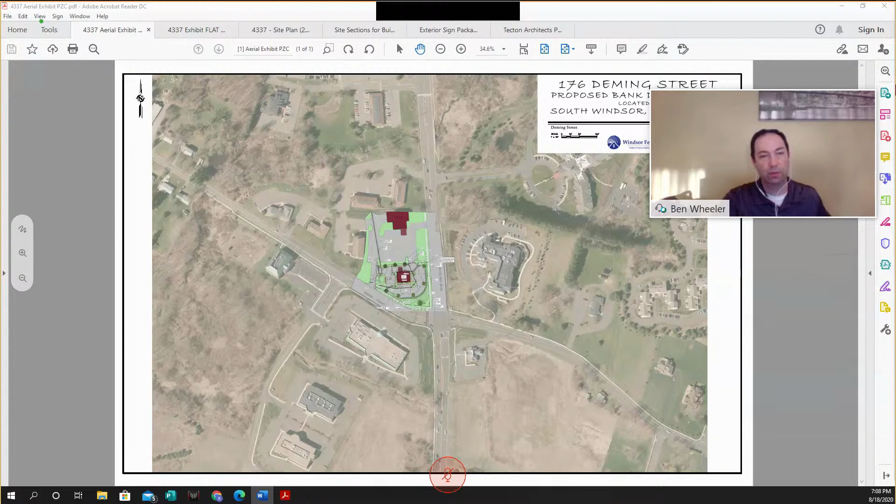The bank building is going into the currently vacant site where Woodcock Attorney used to have his office, in the building that was razed within the last couple of years. So now it's a vacant site that Windsor Federal has an agreement to purchase and build this facility on. The main access for this building will be off of Deming Street at the current access point that services many office buildings and the south end of the Samsel and Carmon Funeral Home, which you see at the north end, the top end of this exhibit here.

That access point will be widened to meet town standards for parking width, parking access width, and to make sure that traffic flow through that area, it will facilitate better traffic flow.

As part of this proposal, we're providing 33 parking spaces around three sides of the building. Only 16 are required per zoning, but as proof of how Windsor Federal is a community player, they've worked very closely with the Samsel and Carmon Funeral Home, understanding that, especially during large events, the funeral home is short on the number of parking spaces. So they've already come to an agreement with the funeral home to use the proposed bank parking lot as overflow parking for any large events at the funeral home. That is why we're providing so many parking spaces as part of this proposal.

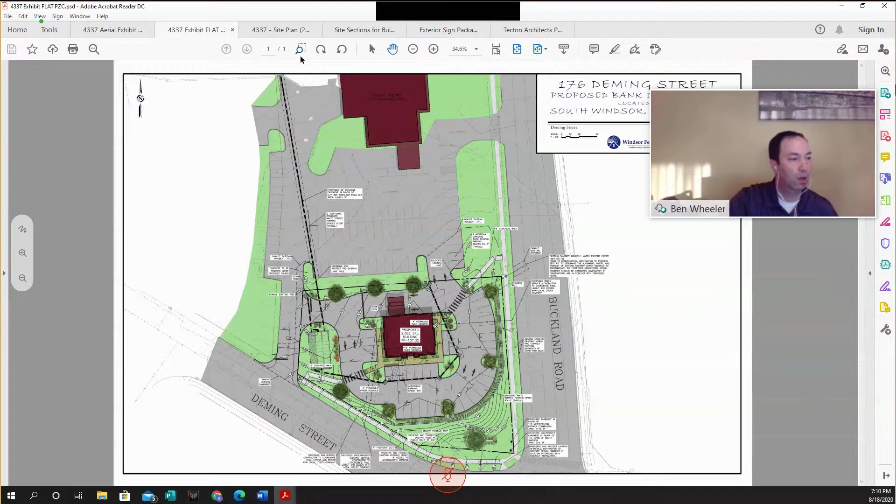If we zoom in on the site plan a little bit, there are walkways around the building. Those will actually be permeable pavers, so it'll be a nice look to the building, complementing the building, and also aid in making sure that we meet the impervious coverage zoning requirements.

In addition to that, we're providing crosswalks and sidewalk extensions connecting to both Buckland Road and to Deming Street. The Deming Street connection will connect into a new sidewalk that Windsor Federal will build all the way from the intersection at the road all the way down to that shared access point that I mentioned earlier.

It's important to note there is no dumpster proposed as part of this site plan. In general, these days in the digital age, Windsor Federal does not generate a large amount of refuse. What is generated is typically either shredded, or the crew that they have that comes in and cleans the facility will take care of any refuse and dispose of it off-site as appropriate.

As for landscaping, we've provided a landscape plan with the application. It provides foundation plantings around all sides of the building with low shrubs and perennials in the islands, as well as several flowering and deciduous trees throughout the parking lot, meeting the zoning regulations.

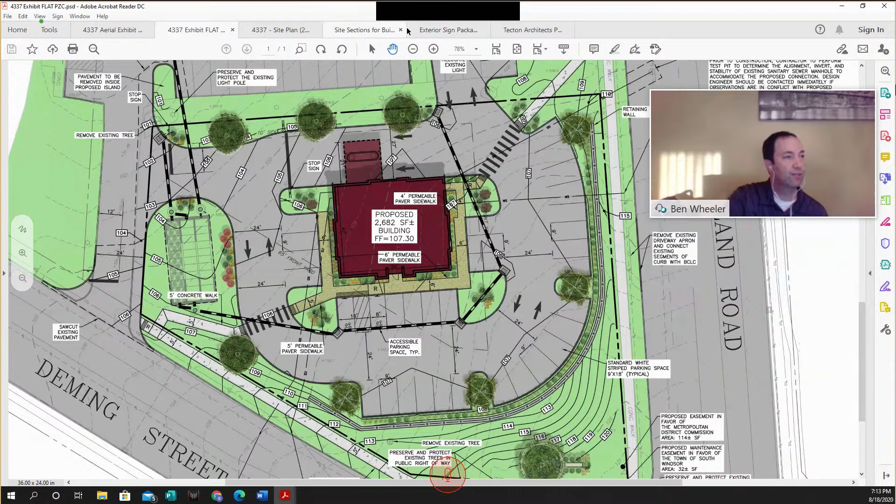As far as the building is concerned, it's a single story inside, but portions of it look like a 2-story building on the outside. The reason is because this building will sit lower than the intersection of Buckland Road and Deming Street, so we wanted to make sure that as you're sitting at that intersection, you're not looking down on the roof of this building.

Nonetheless, it's a nice looking building—a modern colonial look, with a mix of brick at the corners and clapboard siding, and a standing seam metal roof with a skylight at the highest peak to let in natural light during the daytime and provide a soft glow in the evening. This is complementary to other buildings in the area, like the residents at South Windsor Farms directly across Buckland Road, and the People's United Bank on the opposite corner, as well as the funeral home and other office buildings in the area.

As I mentioned, we went to Architectural Design Review Committee and it was very well received. One positive comment was that the clapboard siding areas, originally proposed to be all white, should implement a dove gray color instead—not a drastic change. The updated renderings and plans we've submitted have taken that comment and implemented it to provide a little contrast, so the entire clapboard siding is not completely white as originally proposed.

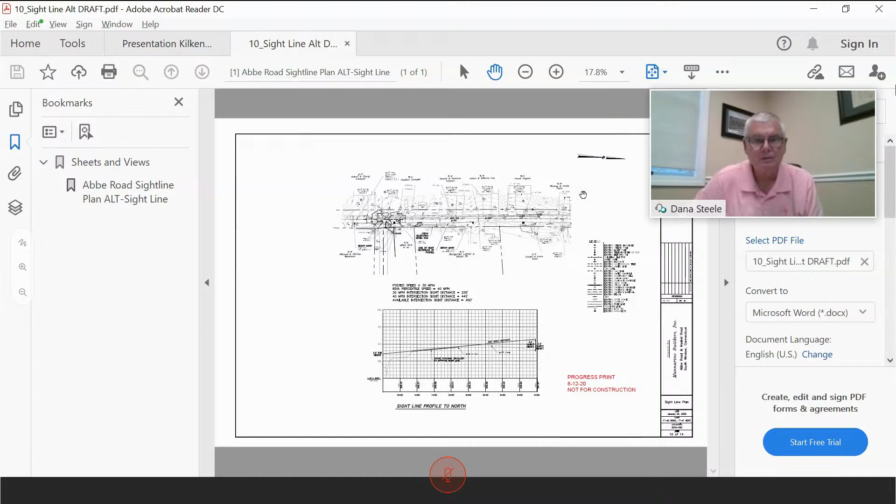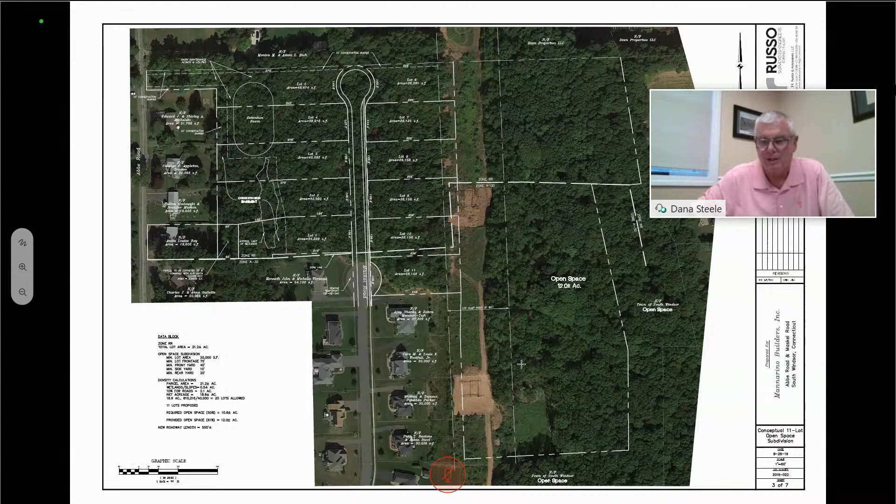There's a third concept, which is the one really that we're bringing before you tonight, which the commission decided is the way they want to go. The staff, public works and so forth, emergency services, decided that they wanted this road to come through and connect up with Abbe Road. That's what this shows.

Again, it's 12 new lots, 13 lots total, and it gives you that additional 12.09 acres of open space. That open space is located over here to the east and to the south and to the east, and again ties into existing open space land that the town already owns. I think we all felt that this was the right way to do this. So one of the things that we did with regard to the open space is, how valuable a piece of land is this?

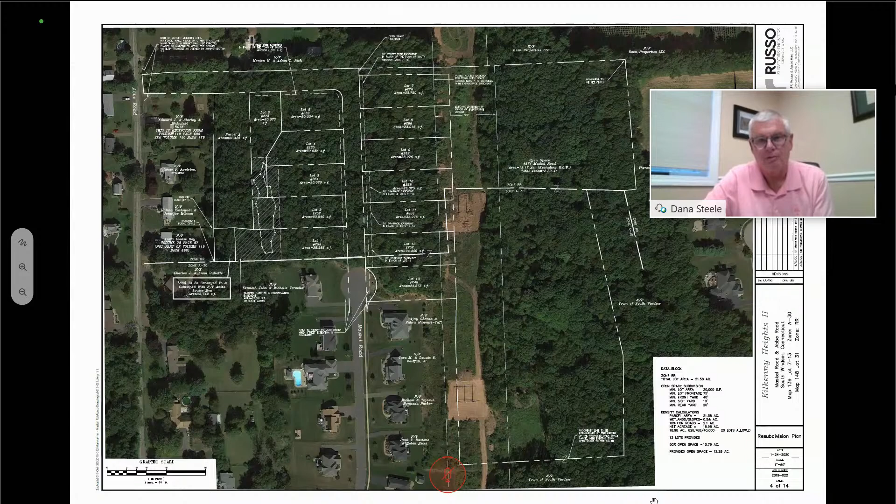What is it giving the town in terms of passive recreation and so forth? So Mannarino Builders hired REMA Ecological Services to go out and take a look at this piece of land. George Logan did a nice report, which is part of your application, and we have that here.

I'm just pulling up one page of it here that we can take a look at on the screen. Essentially, the 12 acres of open space that I've got the cursor on right here is the piece that's part of the subdivision dedication that would be conveyed to the town if this is approved. Here's the end of Maskel Road. Our road would come through this particular parcel and come back out.

But you can see these other areas of green are open space parcels that the town of South Windsor already owns. There's access here, full access off of Fraser Fir Road. This additional piece can be accessed through a right-of-way out to Maskel Road at this location. We're going to be providing an additional access up here on the north end of our project to access the north end of this parcel.

So it's something that really ties together a very large portion of open space for the town. If you've looked through REMA's report, there's a number of things that George Logan talks about regarding this 12 acres of land, but I'm just going to run over it very quickly.

One of the things he mentions is that it's essentially what I guess I'd call a northern hardwood forest. It hasn't been farmed, hasn't been logged recently. He's got photographs back to the 30s. And there are some very large deciduous trees located on this property.

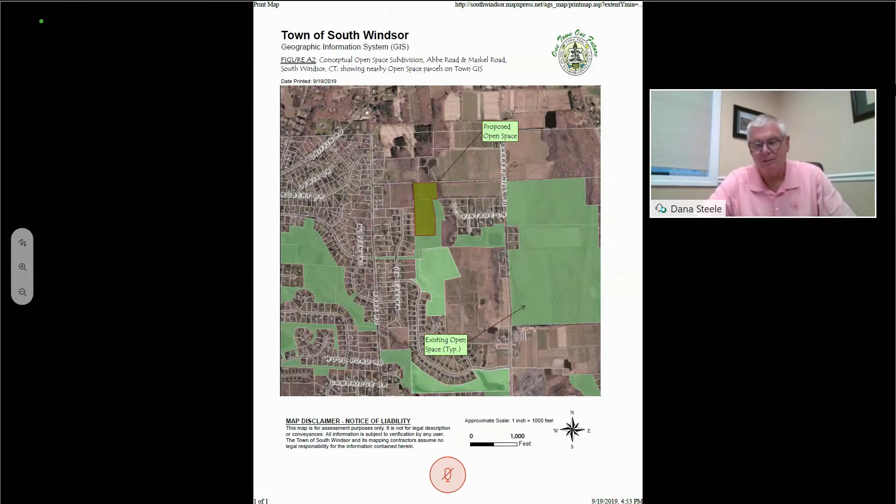So it's important for the town to have a piece of land like this, because most areas, at least in the valley here in Connecticut, have all been farmed for the most part. Anything farmable has been farmed. Trees are typically smaller growth stuff, and this isn't like that. It's a piece of land that's got some substantial tree growth on it.

And I think we have some photos. I'm just going to go a little bit further forward here. If you look at the lower photo, here's a fairly large diameter oak tree with George's auger set up against the side of it.

And I think the next photo shows a fairly large beech tree that whoever Zoe is visited in 1996 and put their initials in. You can see that these trees are probably 70, 80 years old. They've been here a long time. So George's thought is that this is an important feature of this particular piece of open space.

He also noted that it's devoid of any invasive species, which we see a lot around wetland areas. This doesn't have that, which is a nice thing to have in terms of our open space. It's got a lot of diversity in terms of its plant life, wildlife, mammals, and avians, and so forth. And it creates a nice connection or habitat in a wildlife corridor.

It connects up with the rest of the town's open space, but it's also got an Eversource transmission line that runs through it, provides access, provides a walking trail for people who might want to use it, but also creates a nice wildlife corridor for movement of mammals and animals to go north and south through all the open space and onto adjoining properties. That's always going to be there as long as that Eversource area is there.

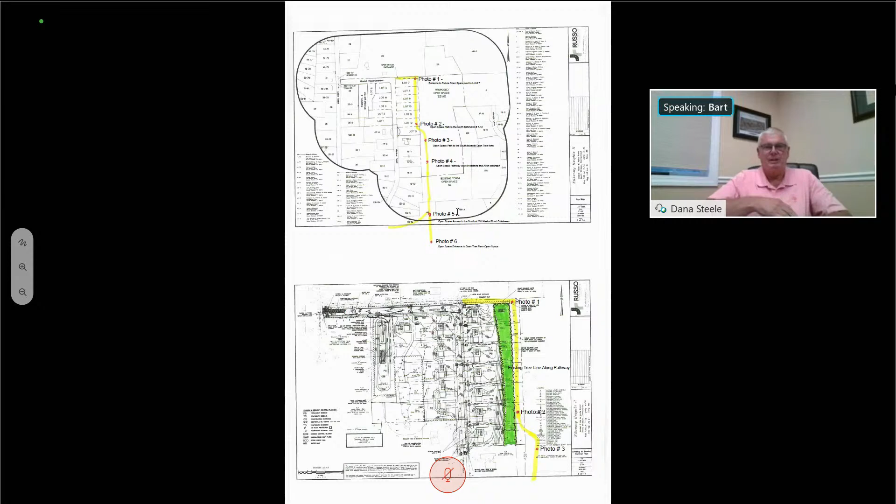So I thought it was important to show you that as we move forward and take a look at what we're proposing today. Let me just switch screens for you. If we look at the upper screen here, Rob Manarino's gone out and taken some photographs of the area of the open space. If you look at the upper photo, we've got photo 1, 2, 3, 4, and 5. These were taken along the walking trail that's already there on this open space. We can show you these photos so you can take a look at those.

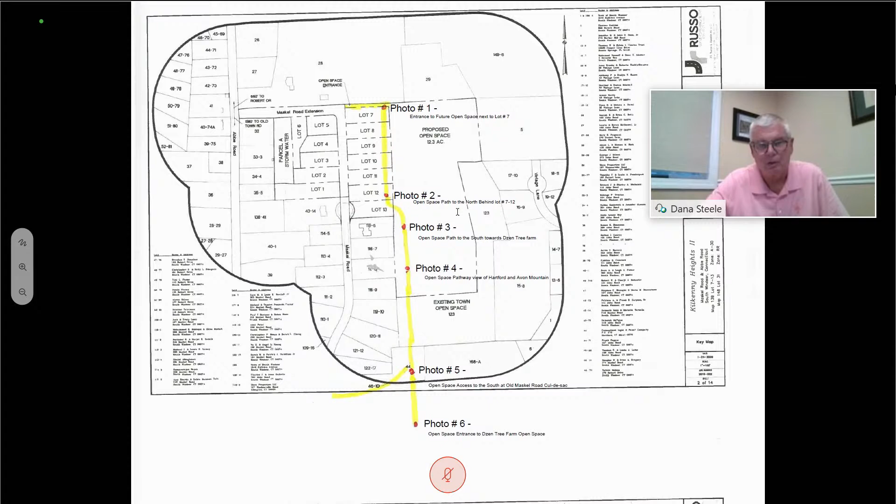Let me go to the next screen. This is photo 1, again showing the walking trail, right where we will access from the turn on our extension of Maskel Road. If the road heads northerly and then turns to the west, we would be accessing at this location with a grass walking path 10 feet wide to gain access off our roadway and reach the open space at this location.

As we move further to the south, Rob's got a photo here again showing the existing path or trail that's already there. This would be used by anybody who wanted to walk onto the open space and go northerly or southerly, or continue east to take a look at the forested area. Photo 3, again, access to the open space heading southerly, and as you can see, it's a very nice trail.

It was recently improved by Eversource when they upgraded the transmission line in this particular location. Photo 4 is an area where, I don't know if any of the commissioners have been up here. I have been up here, probably 6 or 7 years ago, with the property owner.

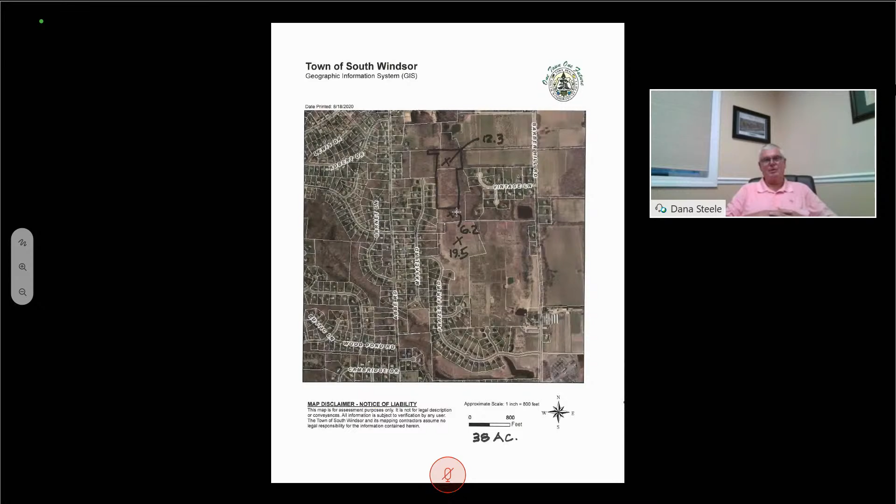So when you put all of this together and add it up, we're looking at something that's just under 40 acres in size, so it's fairly sizable. And again, one of the more important features is the transmission line that runs through this, creating a wildlife corridor going both northerly and southerly from the open space that the town would eventually end up owning.

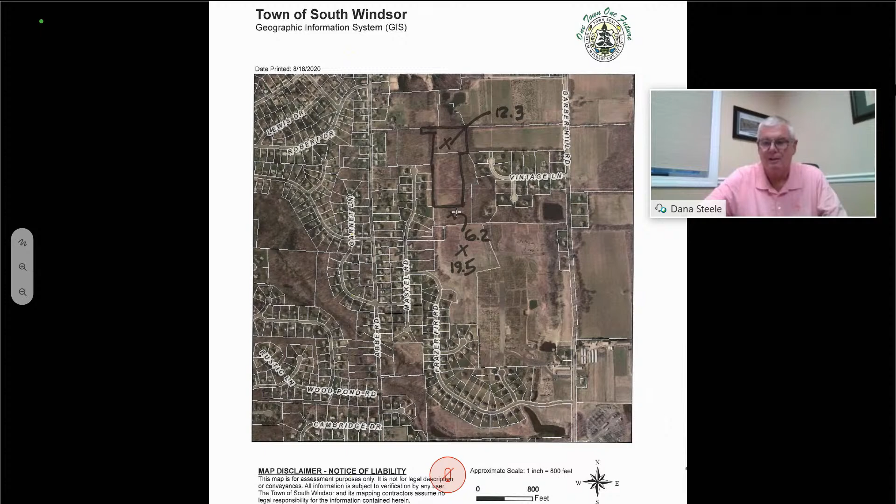I wanted to show you this because it gives you a larger overview of what we're really looking at in relation to the roadway network, Barber Hill off to the east, and Abbe Road off to the west. We've got a very significant north-south corridor for wildlife within this open space, which continues on because of the transmission line. So that said, let's go on to our next item.

Let's go on to our plan set, and I'm going to walk through this with you and show you what we have. As we talked about, Manorino Builders is the applicant here.

The two properties involved are owned by Anita Roy, who actually lives right on Abbe Road. She's lived there for maybe 50 years, and has owned this land for a long time. She's getting up in age and thinks it's time to sell it so she can leave something to her children. That's a wonderful thing for her to be able to leave a nice asset like this to family members as she gets up in age.

Kevin Charbonneau owns the other piece, the one existing lot right at the end of the cul-de-sac at the current end of Maskel Road. The piece of open space to the east of it is also part of that lot, which is where this view is that I showed you earlier in that photograph, where you can see Hartford and off to the west heading towards Farmington and Simsbury.

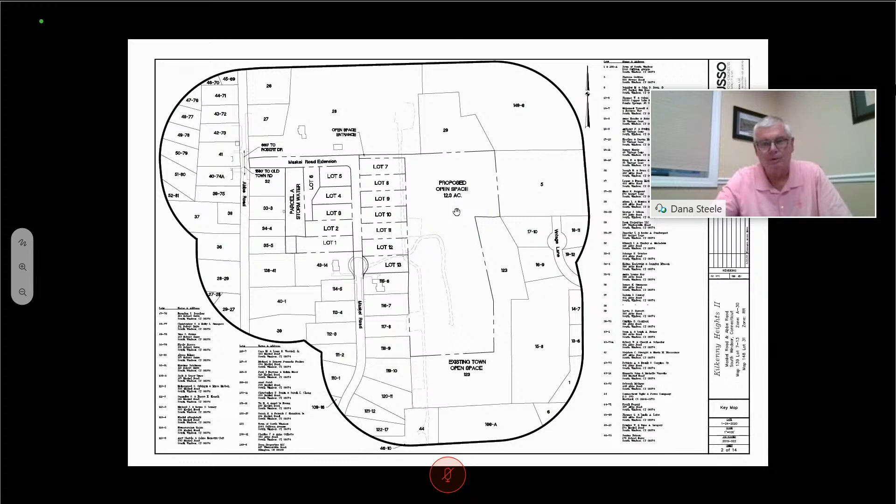So this is your cover sheet, your introduction sheet that tells you what we have within the plan set. This is the overall key map, showing where we are on Maskel Road, the 13 lots we're proposing, and the neighborhood. The area limit map shows all our neighbors, in terms of names, addresses, and property owners. The next sheet is a boundary survey showing all the property.

Again, this shows what's currently here. In the southerly portion, let me use my cursor to show you the existing temporary cul-de-sac that currently ends where Maskel Road ends now. You can see that when this was done, the developers, Manorino Builders, town staff, and the designer at that time left a 50-foot strip here that goes right into the Roy property to allow the extension of this road. This was planned for, as they knew this land would eventually be developed and the road extended into this property with additional residential development. So that's essentially the boundary and existing condition.

This is our re-subdivision plan, a horizontal view of the new roadway. Again, the 13 lots we're proposing, the open space off to the east, and the connection back out to Abbe Road. There's a small area of wetland located right here, I'm showing my cursor on that now, and some crosshatch area associated with it.

So we did go before the Wetlands Commission, conservation commission, I think it was back in December or January of 19. We got an approval from them, we got a permit. The crosshatch area is a proposed conservation easement, which I think was a condition. So there'll be a proposed conservation easement to preserve that wetland area.

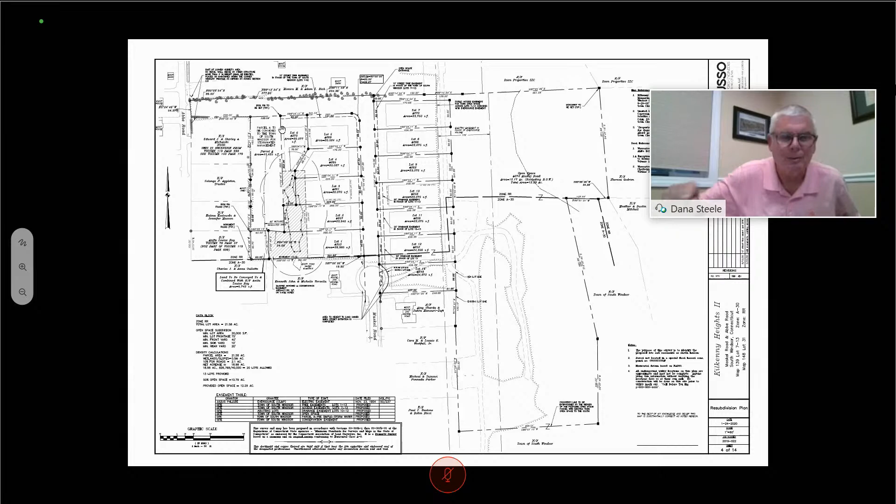We'll have a water quality basin located on what we're calling parcel A, which is about an acre in size, just to the west of this particular piece. So again, that's your resub plan. It meets all of your zoning requirements in terms of the open space subdivision. In fact, the average lot size here is about 23,000 square feet, which exceeds the minimum lot area of 20,000 in this particular application.

The next page is our overall site plan. This adds the topography to it. You can see the land here basically slopes from east to west, draining towards our proposed road and towards Abbe Road, which is the overland flow of drainage on the existing site. It's all wooded other than the transmission line itself, a good portion of which has been cleared where we have the actual towers and wires. Other than that, everything you're looking at is wooded.

Our next sheet is the grading, erosion, and control plan, a topographic plan if you will. Here we're showing proposed houses on each of these lots and how they'd be graded. There are also some yard drains that will be shown to pick up water coming down between these lots and get it into the drainage system.

We're showing that there's more than enough room here to develop these into single-family residential lots, fitting reasonably good-sized houses, two-car garages, and driveways, with usable space behind the lots. They all have nice backyards and plenty of room for outdoor activities.

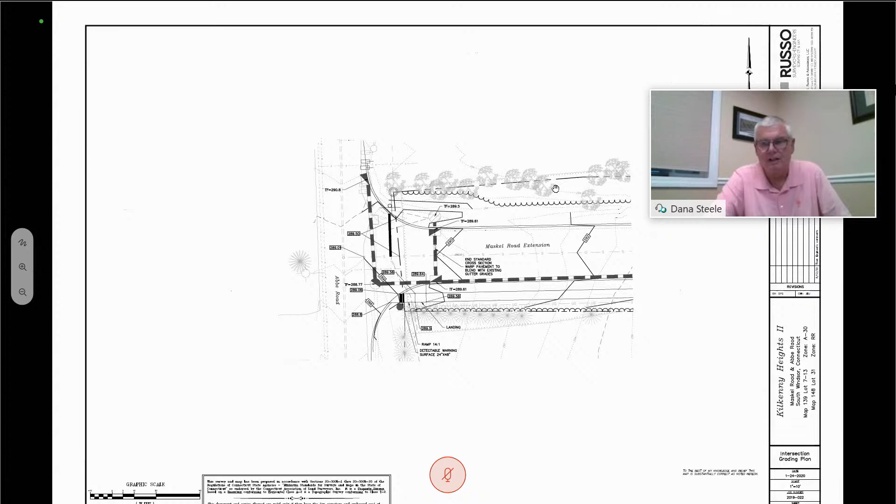The next plan in the set is our utility plan. So let's talk a little bit about utilities. All utility services are available for this - we've got sanitary sewer, city water, gas, electric, and cable. All of that will be part of this subdivision.

All the utilities will be underground here. There won't be any poles with wires and so forth - it'll all be subsurface.

Dana has sized this for all the storm events, and we've got decreases in runoff for all the storm events, 2 through 100, meeting the requirements in your regulations as well as the state regulation.

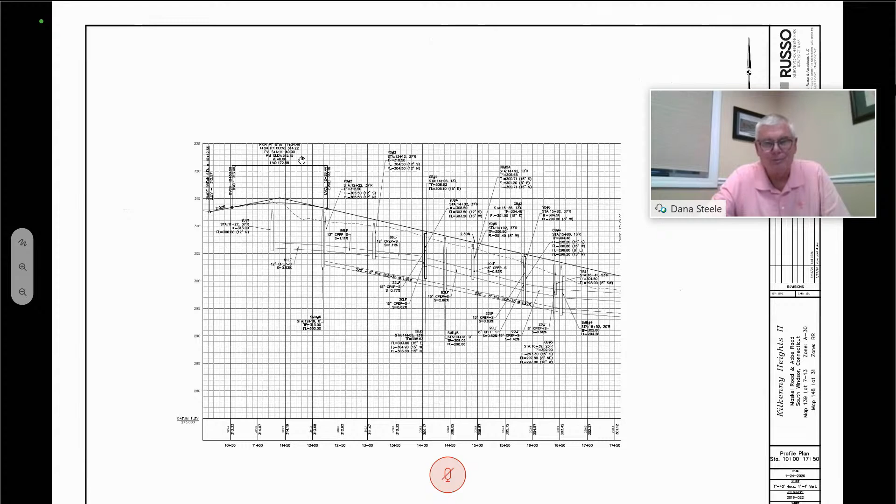The next page is a plan and profile of the roadway - technical stuff, and we'd probably all get bored if I tried to explain it to you. So I'm just going to kind of go over this at this point - again, plan and profile.

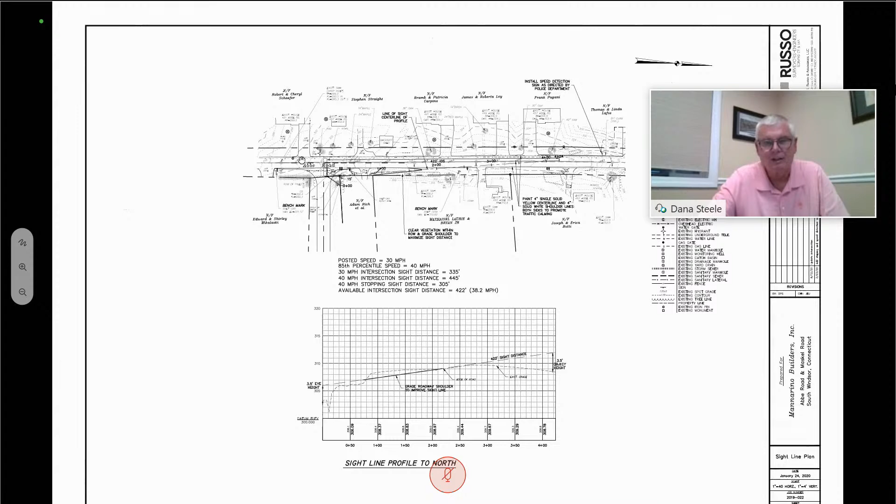This happens to be a sightline plan out on Abbe Road, which we're going to talk about a little bit in a second. And then we've got a landscaping plan here.

Terry Hahn over at LADA is our landscape architect here. She's put this together for you with a variety of different types of street trees, which are required in your subdivision regulations, and those are shown here.

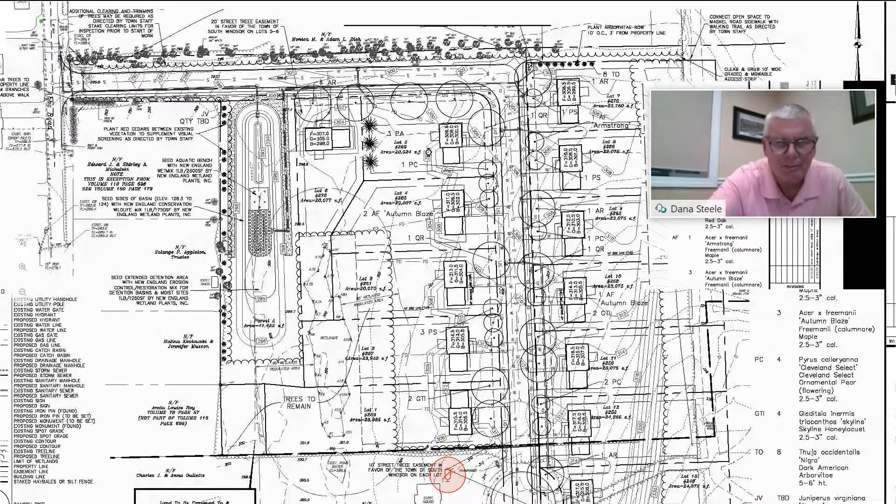We've also added some screening along the rear of the lots here on Abbe Road, to provide additional screening to the area, which is not going to be developed but will be a water quality basin. She suggested some plants to help screen the residents that live in front on Abbe Road. She's also added a little screening between the back of lot number 5 to screen that from lot 6 - those happen to be Norway spruces, shown here in this particular location.

In terms of the street trees, I think we are all deciduous here. Let me just see if I can read this - just bear with me here for one second, I'm having a COVID moment, I guess we might say. Yeah, we've got enough canopy trees, 40 to 50 feet mature. There are some ornamentals. The conifers are the screening trees.

I can't read it because I've got a picture of Frank in it. Okay, oh, there we go. Sorry, Frank, I'm moving you around - you're blocking my screen here.

So the street trees are red maples, Acer rubrum. She's got some pear, an ornamental pear, and we've got red oak, which I think is pretty prominent in the open space off to the east. She's got another type of maple here as well that I'm not familiar with - another street tree, autumn blaze, which actually might be a sugar type maple, I think, but I'm not sure. I'm not a landscape architect, so I'm not going to pretend to go there.

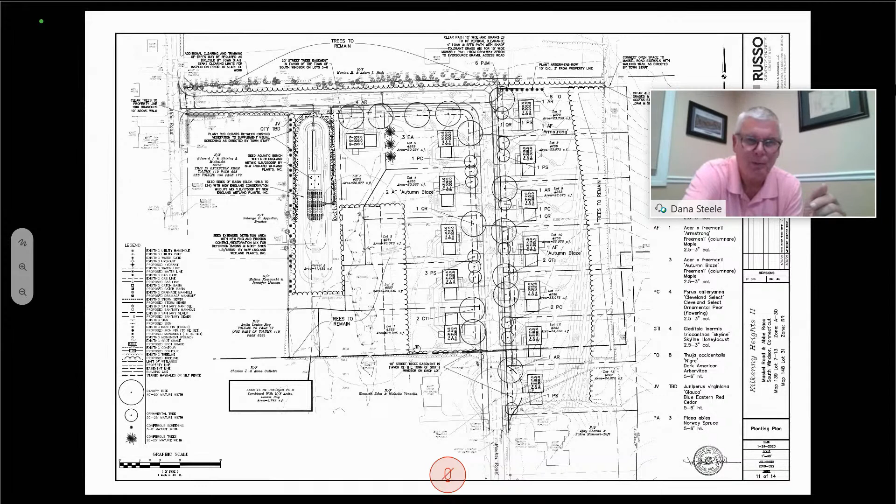And Ben's probably off the call, or he could help us with this. At any rate, we do have a plan that's been put together. I know it's been reviewed by staff, so it meets your regulation, maybe gone a little farther than that in terms of providing some screening. There are some arborvitae, as we said, along the backs of the lots over on Abbe Road.

The open space access is located over here on the bend in the roadway, and there's actually going to be a little paved apron here that'll take us up to the grass walkway that gets us up into the open space. We've provided some arborvitaes along the north side of lot 7, so when people happen to be walking up here, there's a bit of a screen between that and the area where the house is going to be.

The other thing I'll point out is there's also on the backs of the lots here that front on the east of the roadway extension, essentially lots 7 through 13, there's an easement. The easement is coincident with the westerly edge of the Eversource transmission line. The reason that's there is the pathway or roadway that Eversource recently improved is on that section of their easement, and we want that to be part of the open space. So in order to use that, we've created a little bit of an easement on the very rear portion of these lots to allow anybody who wants to come up and walk on the open space to use this existing roadway, essentially, or path that's already there.

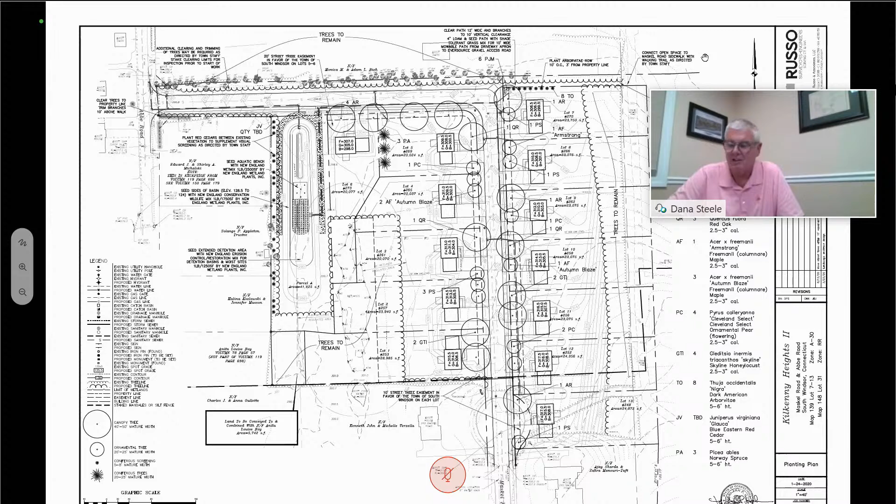In going over this with town staff, this is one of the things we talked about, and we want to be able to utilize that existing roadway that's already there. So we're creating a little easement right along the backs of these lots to provide access for folks to be able to go back and forth within the open space.

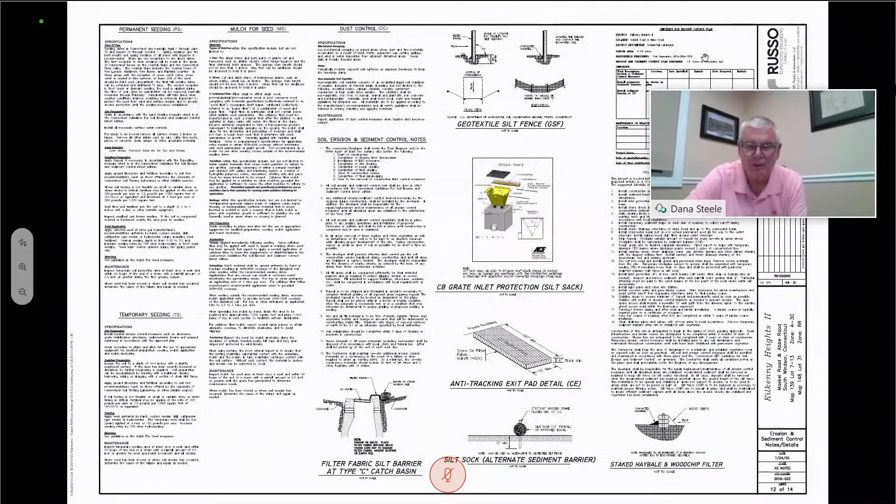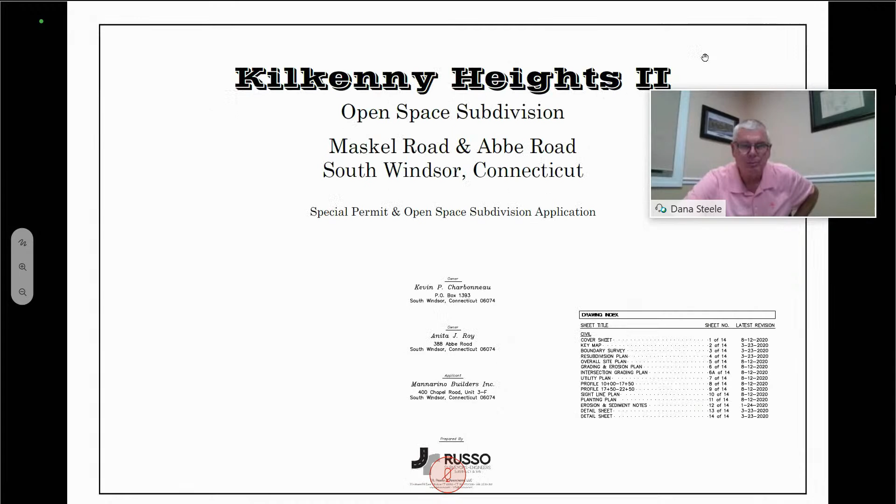We move a little further here. These are just detail sheets, again, all technical stuff. So let me back up a little bit and go back to the overall sheet here. Bear with me one minute.

Maskel Road, as currently developed, has a sidewalk on the easterly side, and we're proposing to continue that walk all the way along the east up to where the road turns westerly. Then we would cross and come over on the south side of the road and continue the walk all the way out to Abbe Road. So in order to do this, we would be looking for what we call a partial waiver of sidewalks, to allow the sidewalks to be on one side of the road, and that's part of the application.

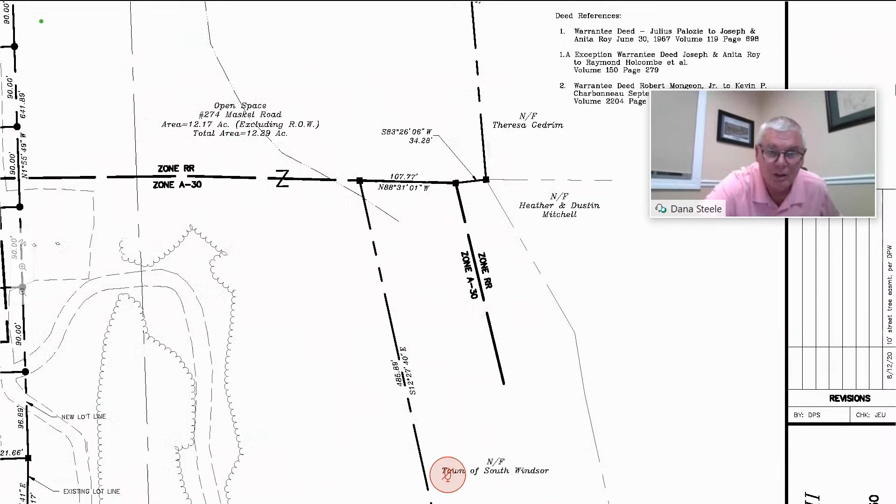The other area we're looking at is the access to the open space up here on the northerly side, just north of lot number 7. Let me see if we can make this a little bigger for you. Okay, here we go. So this is an access that's approximately 171 feet long to get us up into the open space—well, actually less than that, probably 150 feet more or less from where we leave our paved apron up to it. And it's 20 feet wide.

We're going to provide within that 12 feet of cleared area and a 10-foot wide, essentially lawn or grass walking trail to get us up onto the open space. Your regulations require a 50-foot access, which is available to this open space down off of Fraser Fir. In fact, there's more than 50, there's hundreds of feet of access available at that particular location, and that will be part of this open space should this be approved, and you'll be able to access it from that location. There's also an access which I'll back up here a minute to show you.

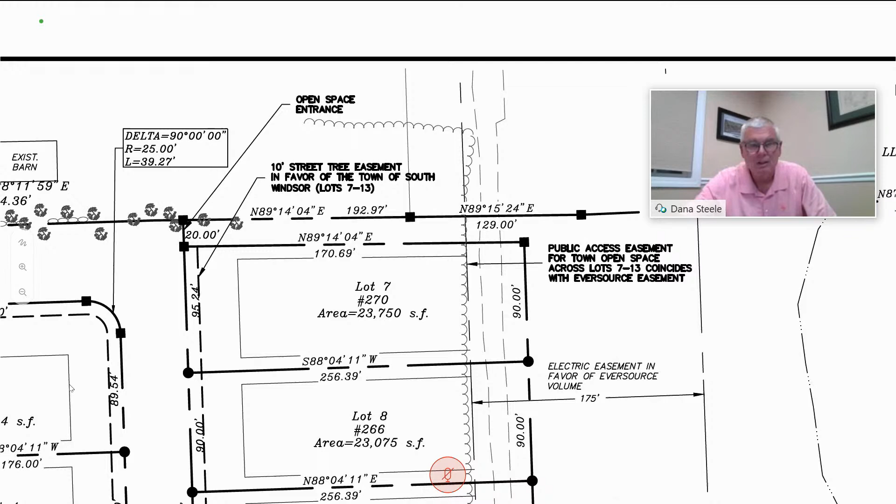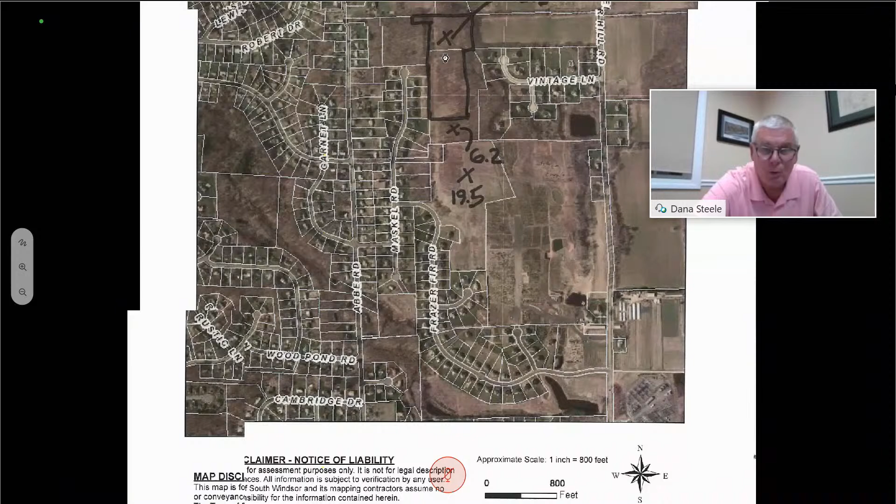I'm going to go back to an earlier view. There's another access to this that's located right here off of Maskel Road, where you can get up and again get onto the open space. This was also recently improved by Eversource. So there'd be access up here at the end that we're looking at, which we would be providing as part of this application, 20 feet wide.

There's access here across the Eversource roadway, if you will. And then there's an access here that's hundreds of feet wide down off of Fraser Fir that has actually a little parking area for folks to be able to pull their cars off and get out and walk up onto the open space.

So within this 38 acres that we have a southerly access, I'll call it a midway access, and a northerly access that would be part of this particular subdivision, should it be approved. But again, we're looking for a waiver on the access to the north. This subdivision is allowing us a 20-foot access where 50 feet is talked about in your regulations. So that's a pretty good overview of the plan set itself.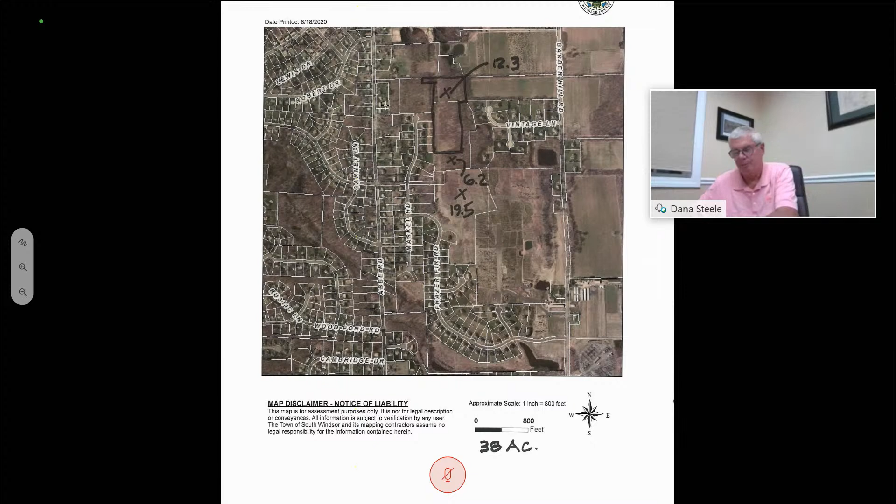Let me just go back again and get into a different screen here. I want to talk a little bit about the approval process.

In your application package, you should have a letter dated January 29th to Michelle, the Director of Planning, written by Dana Steele, my partner, and it does a very good job of walking you through this entire subdivision and laying it all out, a little more concise and detailed. One of the things important to note is that in your regulations under section 8.4.b, there are 14 review criteria talked about in your rules, and we believe we meet all of this criteria. Dana has gone through 1 through 14 and told you how we feel we meet the criteria for approval under this section of the regulation.

I'm not going to bore you - it's over 2 pages long, actually closer to 3 pages. I'm not going to read the whole thing. It's part of the application, you have it as part of your application package. It does a very good job of explaining to you and putting forth what's required in terms of your regulations. We know you all know that, but it just gets it all on paper so we can all talk about it.

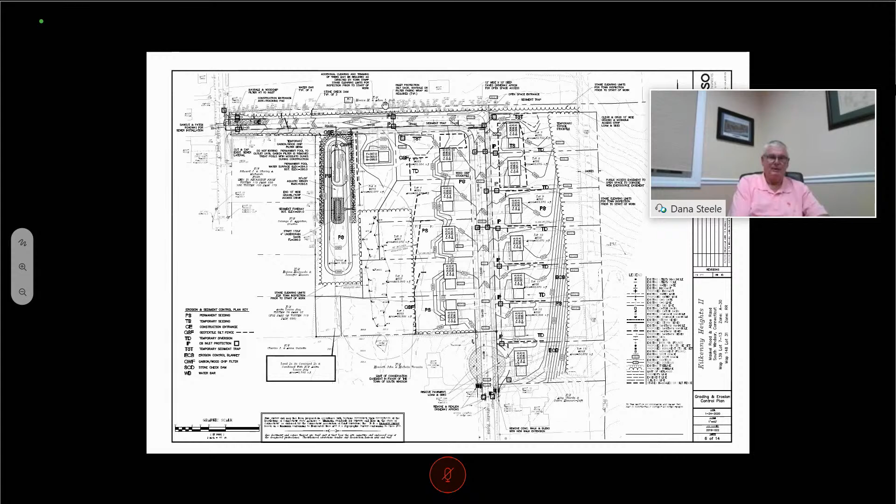Jay Ussery did a really good job explaining the history of this. As the commission recalls, the applicant came in front of you back in October of 2019 to discuss the layout and whether or not the commission wanted to see an open space subdivision, which was the consensus at that time. Subsequent to that, the applicant came in front of you with a formal application to try to get a waiver to the cul-de-sac length, to just cul-de-sac this road rather than bringing it out to Abbe Road. The commission denied that request in favor of the road pattern coming out to Abbe Road. So that is what is reflected in the plans in front of you tonight.

Just to point out a couple of the guidelines under our open space regulations for the objectives of open space: they include promoting preservation guidelines in the various plans we have, being the Open Space Task Force Plan, the Plan of Conservation and Development, and the Recreation Plan. We preserve and maintain all or any part of existing forests, fields, pastures, and other land in agricultural use. We're considering the preservation, creation, and connection of areas used for wildlife habitat, recreational corridors, and trails. We're looking for pedestrian access between properties, locating in areas where the land is contiguous to other open space properties, preserving scenic views and vistas, protecting and preserving historic and prehistoric sites, and maintaining the visual integrity of hilltops and heavily wooded areas.

So we would be going in the field with Jeff as our consultant and staff member to provide additional plantings along the backs of those lots. These are what were proposed by our landscape architect. It's basically conifers for screening, 5 to 6 footers, to provide the screening. And the specific locations along the back - I've got it back up on the screen here now so you can see it. Bear with me a minute, I'm moving it around.

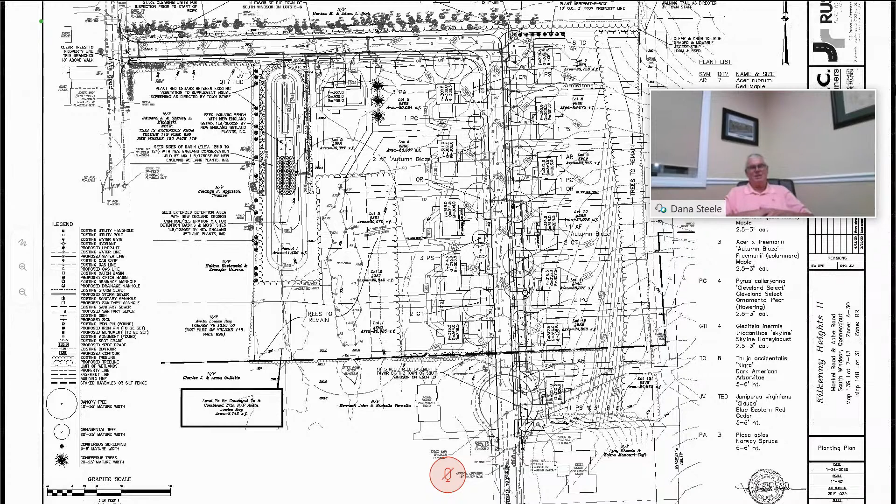If we look at the cursor, we're talking about that additional planting along this area, and we'll actually be planting within the existing wood line. Jeff felt it was necessary for him to go out with the developer and pick the spots where these trees made the most sense, because they need to get a little bit of sunlight. Rather than just have a contractor do the planting, if he got involved, we could pick these spots strategically as to where they needed to be planted and would do the best in terms of growing. Again, that's along this particular area here, all the way along the backs of the existing houses.

Jay, I'm not seeing your cursor moving, so I don't know where. I believe you're going to the left of the detention basin, correct? It's to the left of the basin, between the basin and the property lines. It starts at the proposed roadway extension and runs southerly, essentially all the way down to the end of the clearing adjacent to Anita Roy's property. So it would be along Musson, along Appleton, and along - I'm having a hard time reading - Edward and Shirley Michalski, I believe. So there would be plantings along all 3 of those properties.

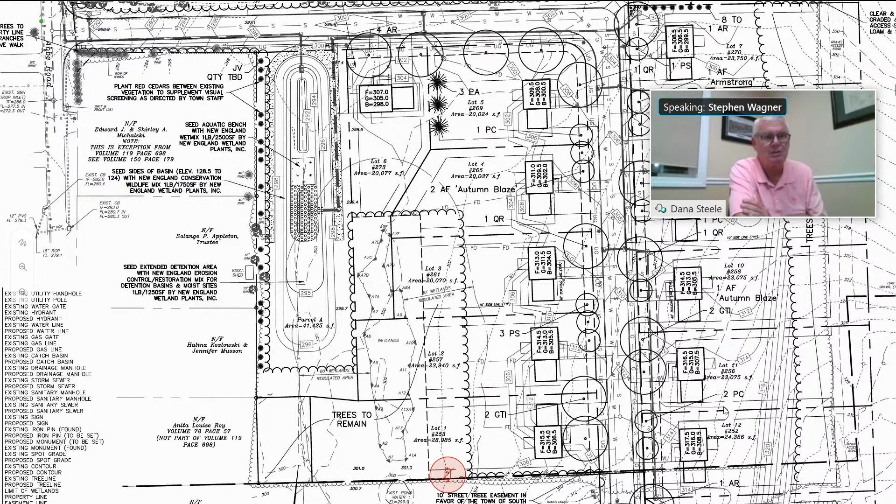It's notated on the plan that we're showing red cedar, but as I said, Jeff Folger would be along and would be pointing out where we should put these and how they should be planted, and the best locations in terms of their performance and future growth. So it is proposed, and it was something that was considered, because the concern came up when we were before the Conservation Commission.

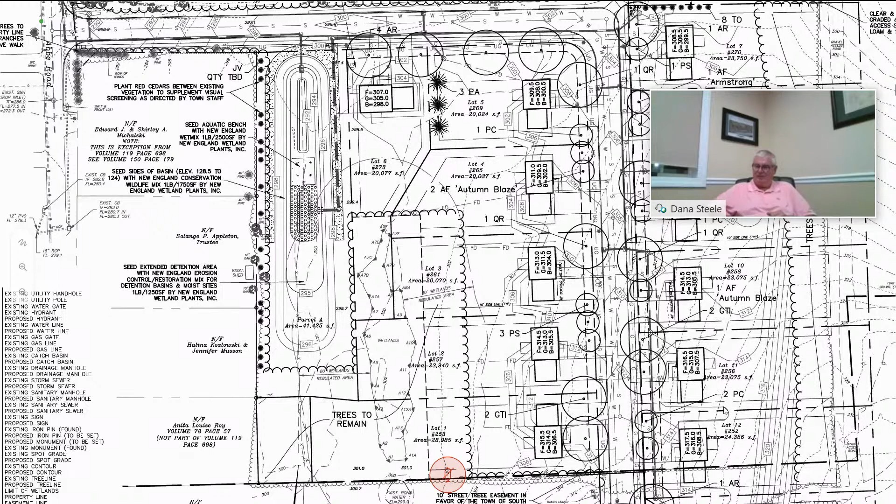Okay, thank you, Jay. At this time, I just want to address - this will be my last question for tonight - but construction hours. There have been many residents who spoke with a concern about the construction hours. I just wanted to hear once again, what are the allowable construction hours? I know South Windsor has, I believe, an ordinance.

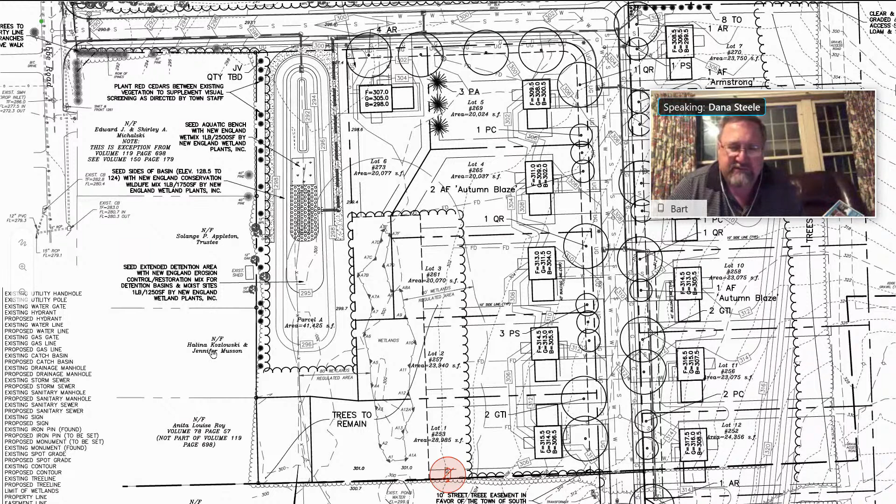Yes, we do, Chairman. I have it right here. We do have a construction ordinance that applies in our residential zone, so this project would be subject to it. In essence, construction cannot occur between 5 p.m. and 7 a.m. So you can work from 7 to 5 Monday through Friday. Bear with me just one second. The hours are 5 p.m. and 7 a.m. Monday through Saturday, or at any time on Sundays. So you cannot work at all on Sundays or holidays, and 7 to 5 would be the hours.

Okay, but that includes Saturday at this time. Correct. And if we ask them not to work on Saturdays, I'm wondering if they would agree to that. That would be a question for the applicant, and they can answer that question the next time we come back. I don't have a problem with that.

Okay, so at this time I'd like to continue the public hearing to a future date in September. I'm not sure if it'll be the 8th or the 22nd, but I'd appreciate if somebody could make a motion to that effect, to extend the public hearing to our next.